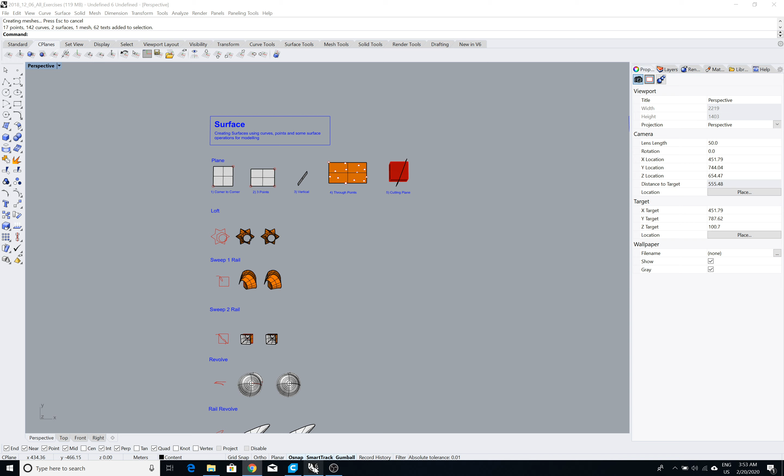Today is the second session for Rhino, and we will be starting our day with surfaces as a topic, and eventually I will also go through some transform commands while using the software.

Last week we did more or less all the commands in curves, and we tried to explore different ways of creating a curve and different ways of changing the curve, such as extending, filleting, chamfering, connecting, blending. I also showed you some of the examples that we could create from curves from two views.

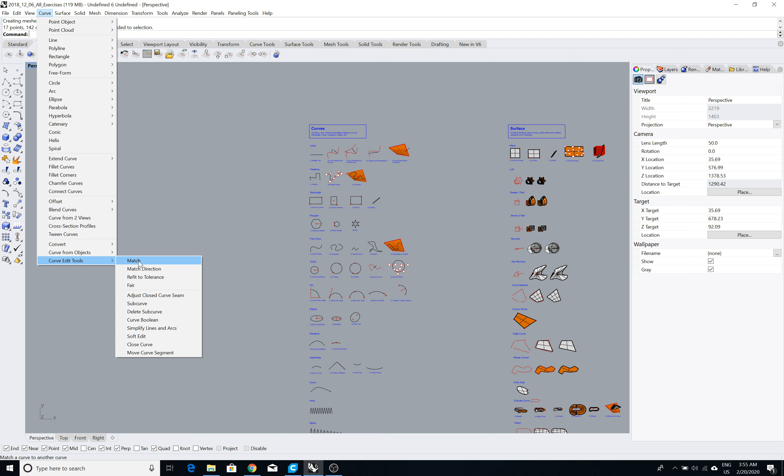I have purposely not gone through some of the other utility commands that you see in the curve tab, such as project, pullback, intersection, contour. I'll go through some of these commands later during our sessions. We would in fact start to create some geometries today, as we would have a good understanding of surfaces by the end of our lessons.

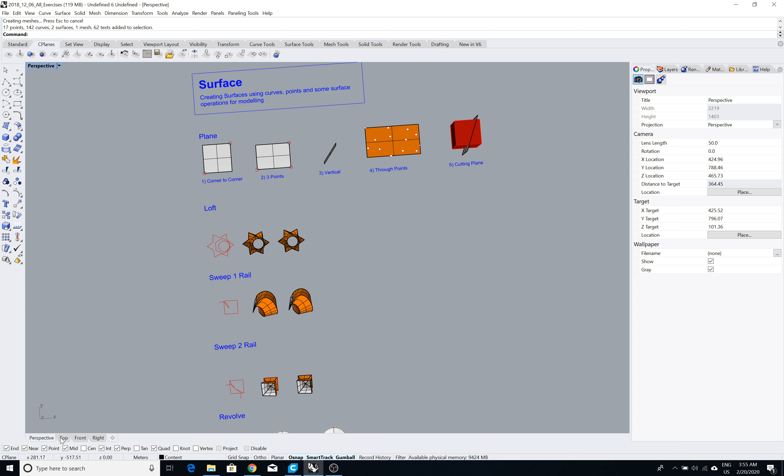So talking about NURBS surfaces in general, they are completely different from the surfaces we might be seeing in different modeling softwares. A property of a NURBS surface is that you can consider it as a plane with direction. You can name both directions as u and v, and the real definition of any point on this surface would be defined by its value between 0 to 1 and the degree of the points.

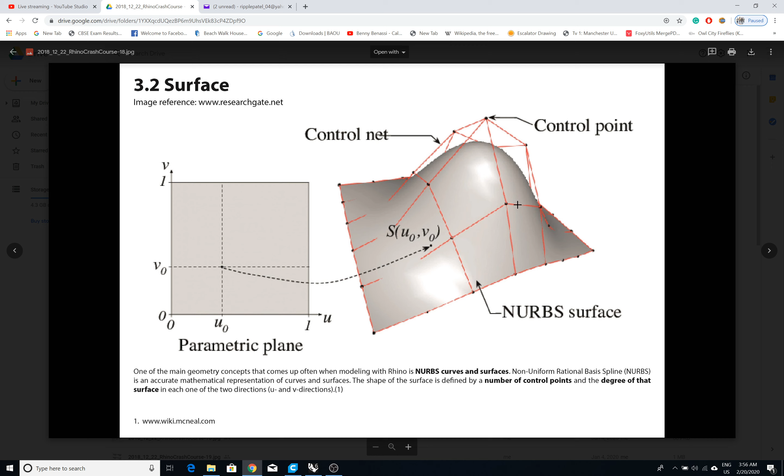So as you see in this image, each point has its own index, such as in this case u0, v0, and it has its own degree. That defines the curvature of this surface, and that you could say is a NURBS surface.

So there are some pros and cons of why we should be using NURBS surfaces and why we should sometimes be using mesh surfaces, but the most efficient way that I found would be to use a NURBS surface rather than a mesh surface, particularly in this software. There are other softwares which do this job quite well, but I think Rhino is more efficient and faster than most of the mesh modeling softwares.

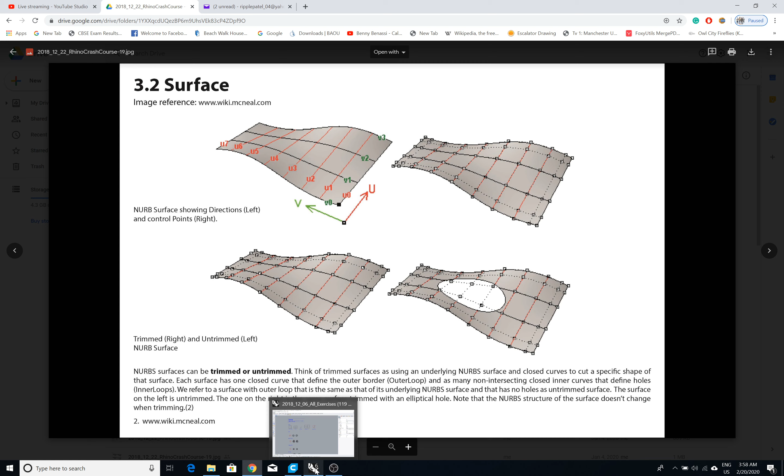But that being said, you could understand this better once we start modeling some things with surfaces, and once you start to understand some of the commands for creating a surface and some of the commands which act as utilities to these surfaces.

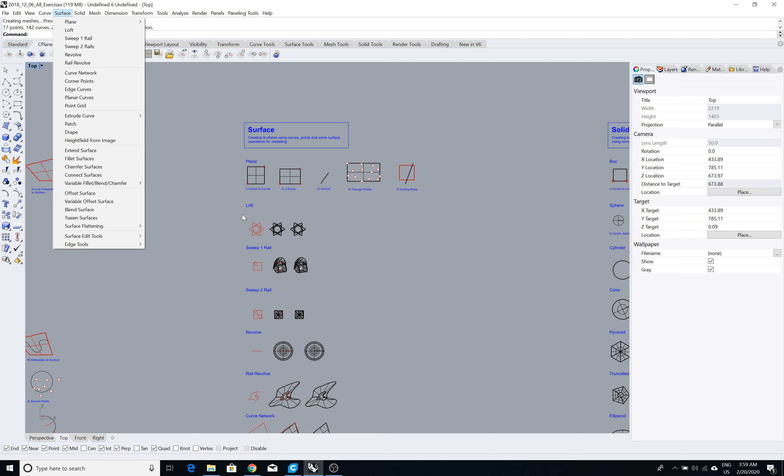As we discussed in our previous session, the first half of these tabs would be filled with commands which help in creating the surface in the design space, while the rest of them are utilities such as extending, filleting, chamfering, as we learned in our curves command tab.

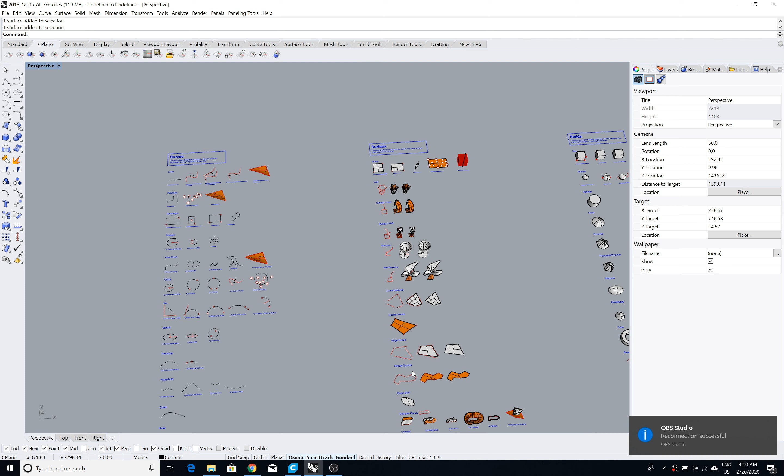So to start with, the very basic surface would be a plane. You could use either a planar surface command or this planar curve command.

So in this case, say if you have created a rectangle, and I would like to create a surface of this rectangle, I could just select the curve, go to surface and say planar curve. I will get something like this.

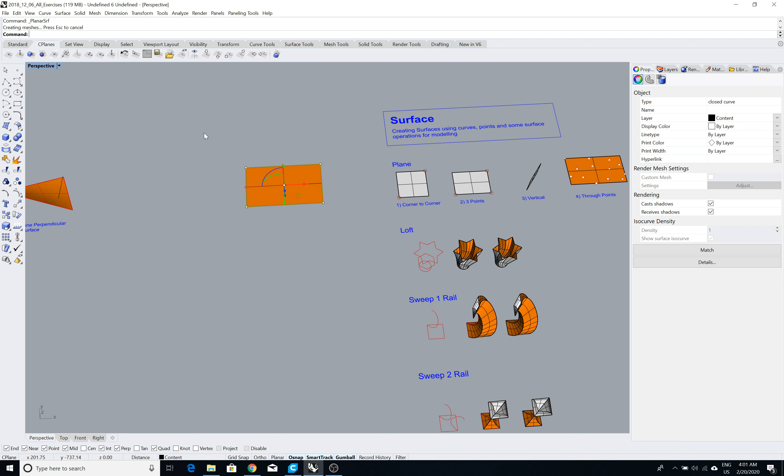While we are creating a surface, there are positive and negative sides of the surface. What I mean by positive and negative side, or a better way to say this, is the front and the back side of a surface.

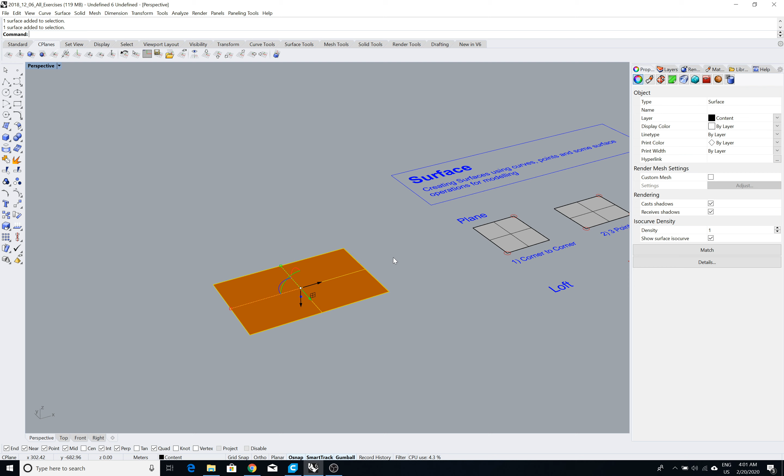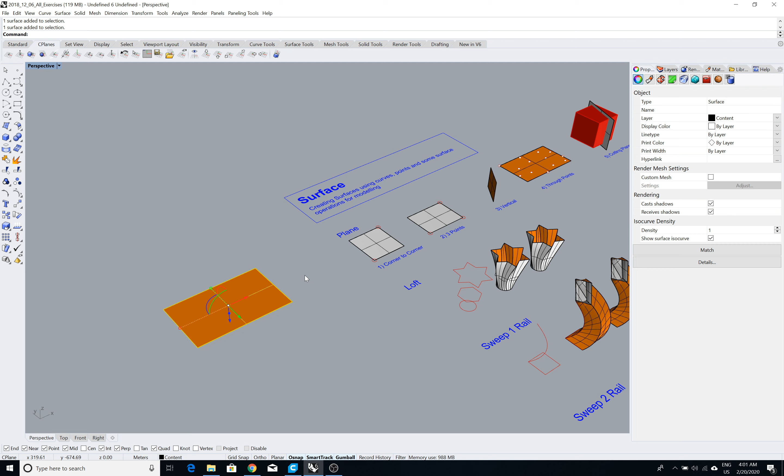So in this case, I have set in my preference the negative or the back side. As you could see, some of the surfaces have a grayish or whitish shade, while some of the surfaces show a more orangish look. So you can see this particular geometry very clearly, and you could easily depict that the outer surface has a gray shade and the inner surface has an orange shade.

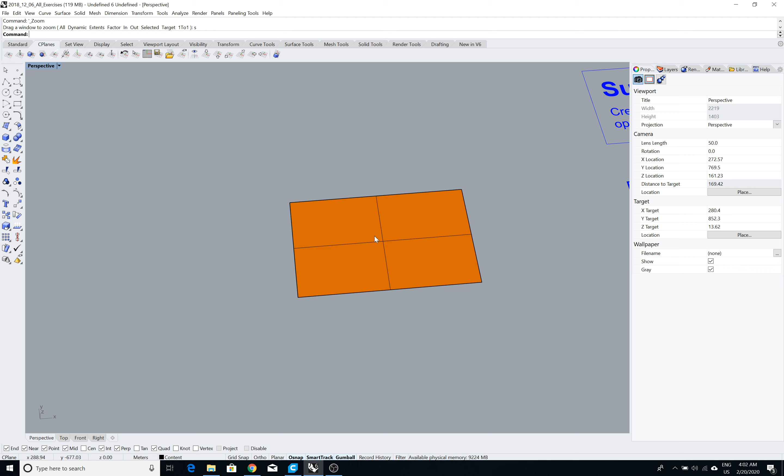Sometimes it's quite necessary to have the faces, the interiors or the exteriors, the same as the other ones while we are using these surfaces. If you are just independently creating some things, it's okay to have a negative surface, but I'd recommend you to model with more positive surfaces.

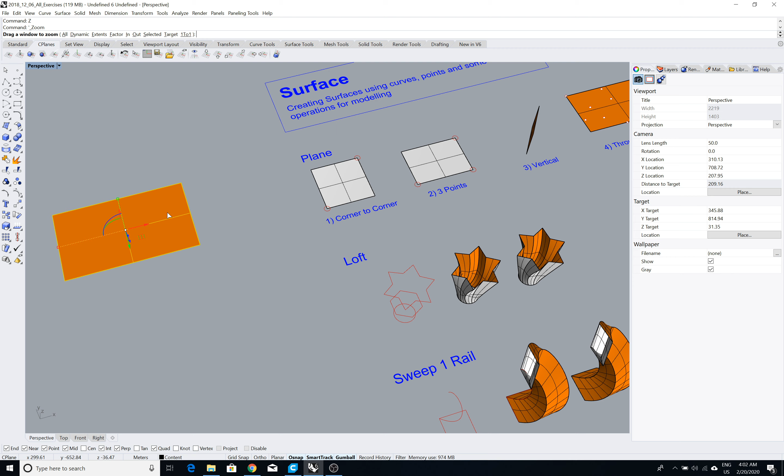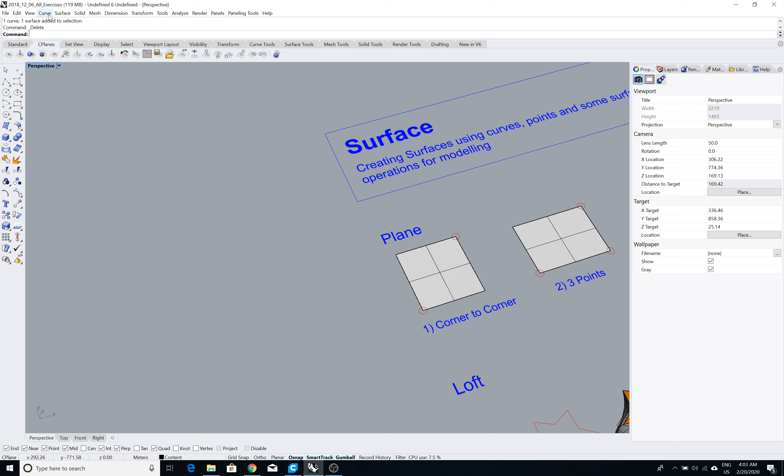If you would like to flip this, you can just type in the command box flip, and you should be able to find a surface which is positive. But before that, let's start by making a plane, or making a planar surface. So it's quite easy. As I said, it's similar to creating a rectangle, and there are other ways you could do it.

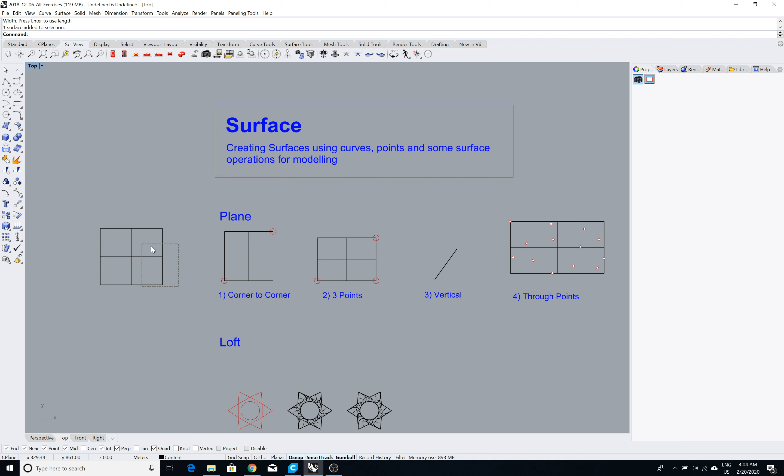I'll just very quickly go through some of these commands. I'm sure you have this file and you will be referring to this file while you are creating your own personal library or catalogs of this practice material, and I think it's a better way to practice, where you could just use this file as a reference and create your own version of this file to remember it yourself.

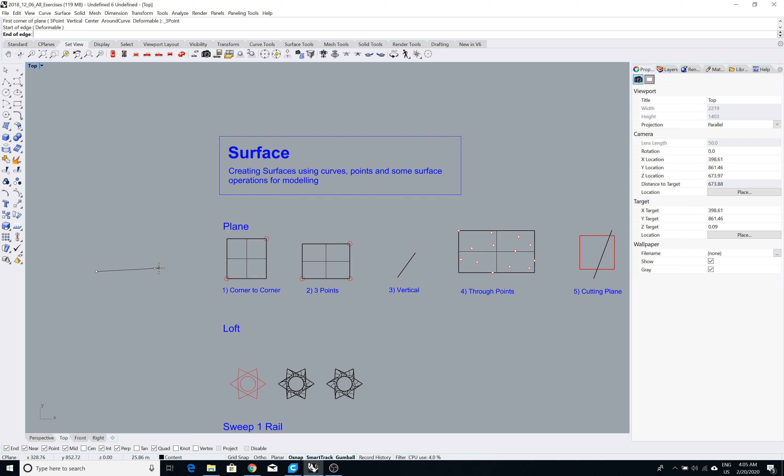So I just created a surface with 3 points. It asks for a start of the edge, so I specify my start point. I say that I need 10 units, so I can see that it limits the length to just 10 units, and I can choose a direction in which I would like to have my length oriented, and then I could just type in another unit, like 20, and you can see that it also asks for the direction in which you could orient your plane, and that's how I make my plane with 3 points.

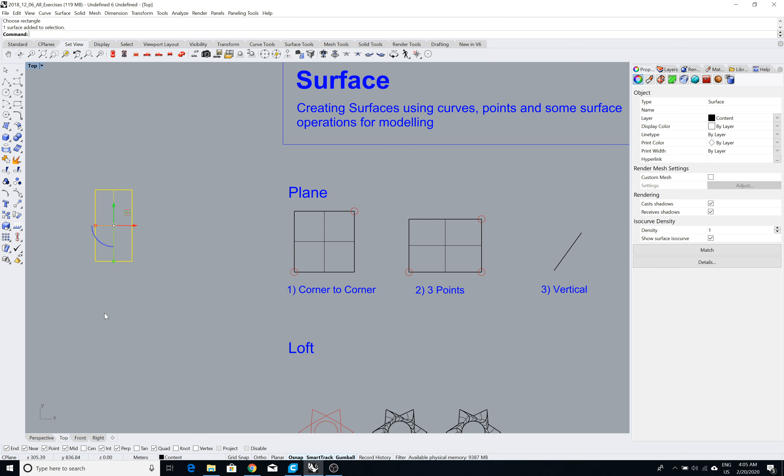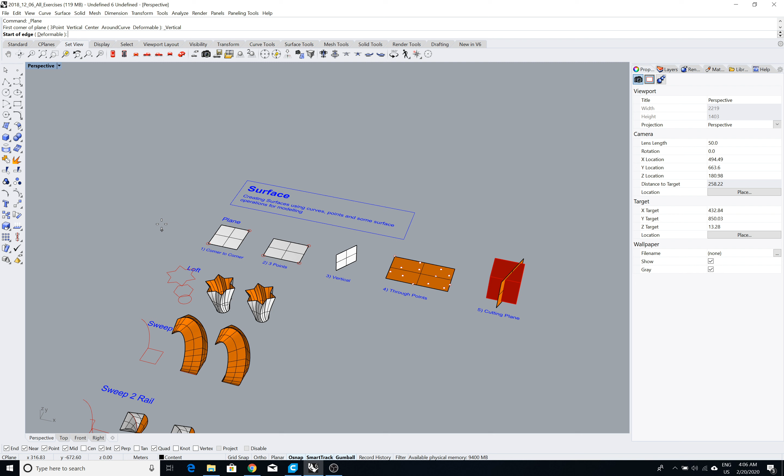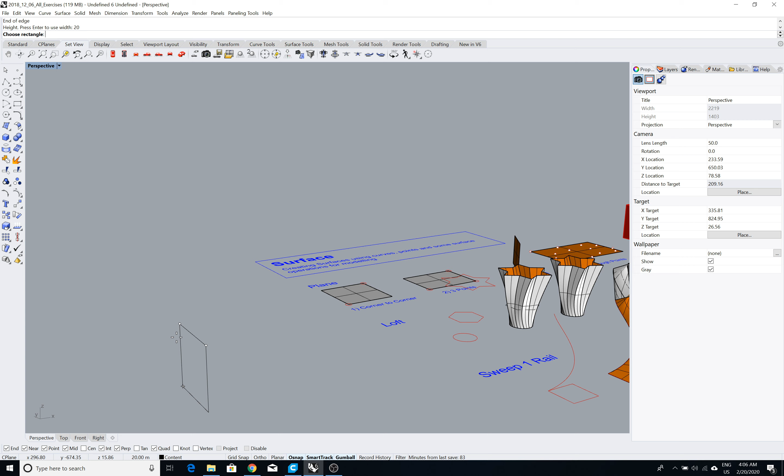Another good example would be creating a plane which is vertical. So let's say you have this surface and you would like to create a vertical plane. So I select the length, let's say 20, and it's gonna ask me for a direction in Z. So let's say again 20. It asks me for a positive Z or a negative Z. So this is one way you could create a vertical plane.

You could also create a plane through points. So if you have this bunch of points, you could just select these points and say surface plane through points, and it would create something like this, as you can see.

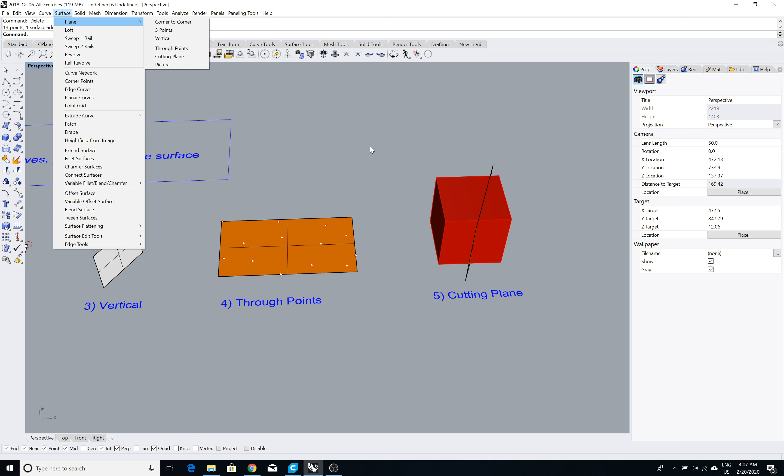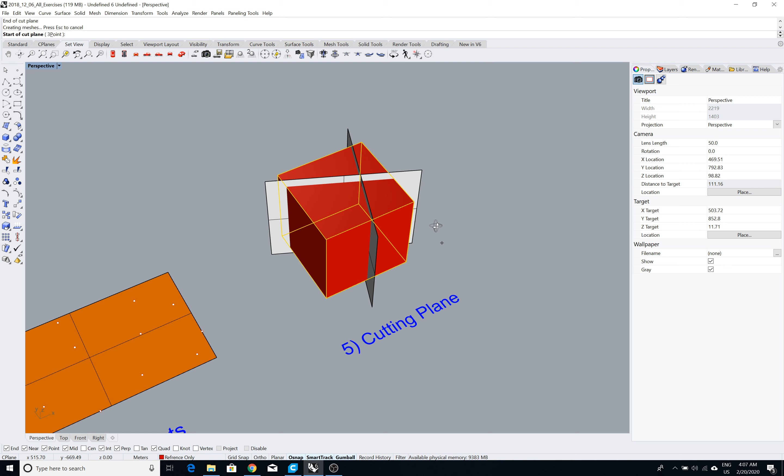Another cool command that I would like to show you would be a cutting plane. So if you have already existing geometry and you would like to just cut a plane through that geometry, then you could use a cutting plane. It asks to select objects for cut, press enter, start of the plane. Let's say I want to start my plane here and end my plane here. So it would more or less create something with some tolerance. So you can see this is the tolerance.

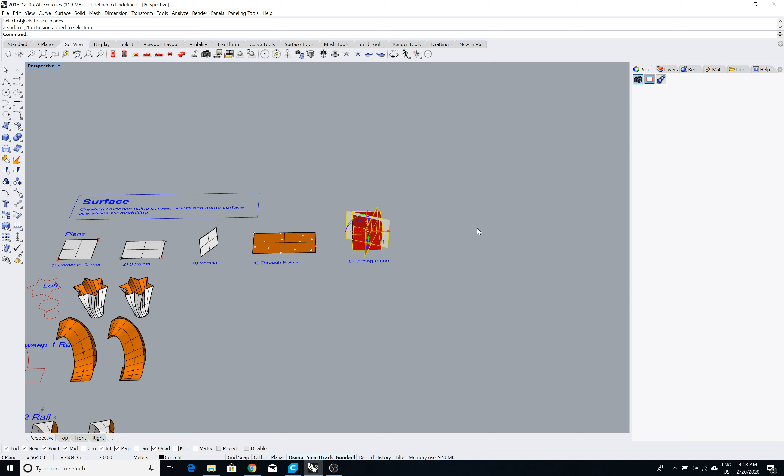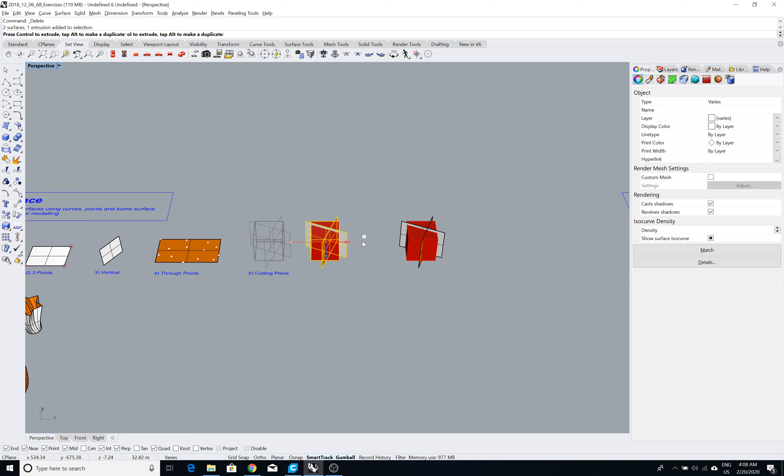So what are some advantages you could have from here if you would like to have multiple planes? Let's take this geometry somewhere and create something from here. To copy or duplicate anything in Rhino, you could just select the object, press Alt and drag your geometry in whatever direction you would like. So again, select the geometry that you want to copy or duplicate, press Alt and just drag your gumball. That's a shortcut to create a copy and duplicate.

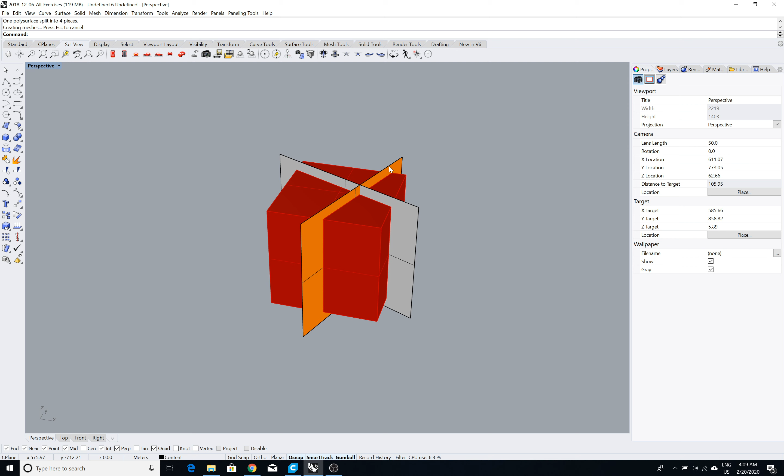What you could do is you could just use these planes to split the object at multiple locations. So let's use this command called split, and you can select the object and you can select the plane through which you would like to split. I'm just gonna hide it. Control H is the short form of hide.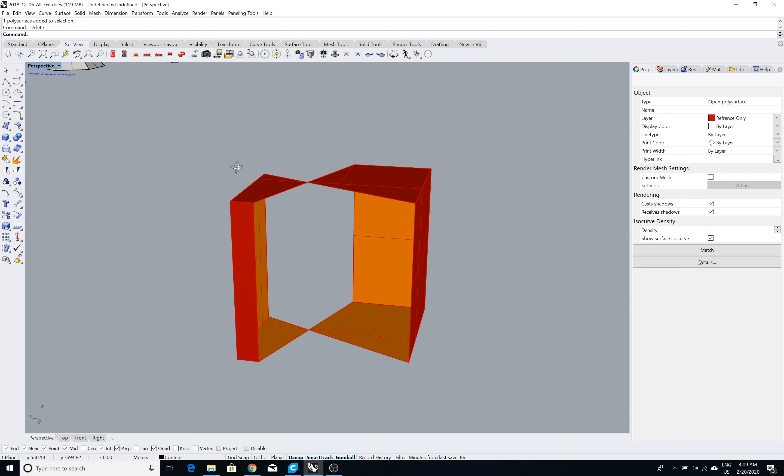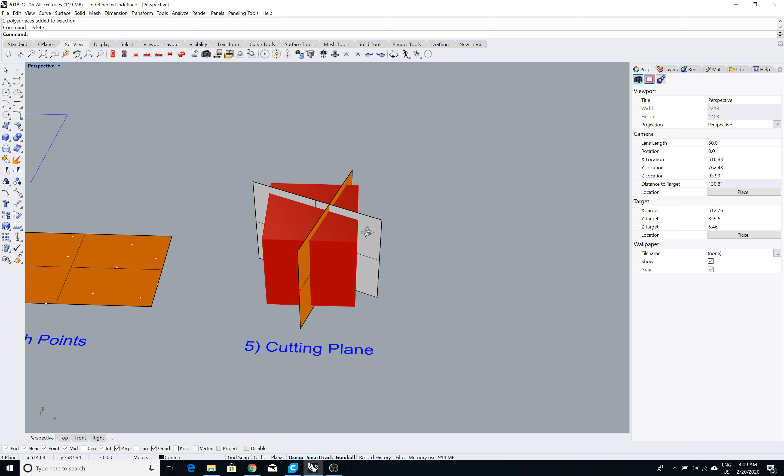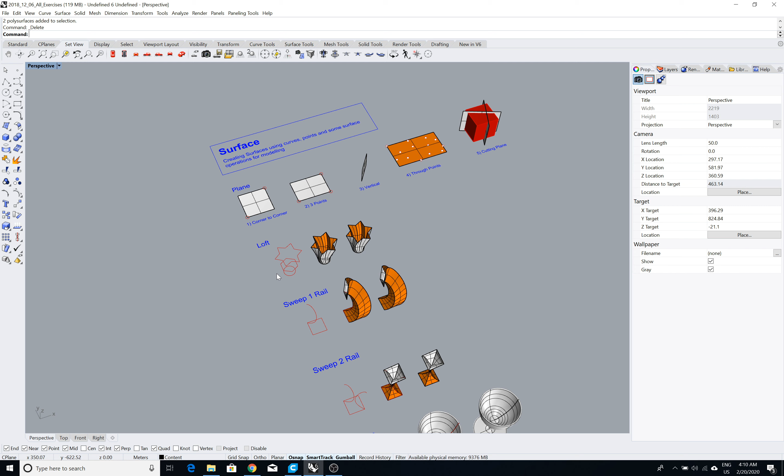You can try to create some geometry as you might desire with this particular cutting plane technique. I would like to see how effectively you could use these tools. So we will go through creating some geometries like this using such techniques later while exploring other geometries, or while we start formally with creating each of the geometry that I have created on this particular screen. So I would formally introduce you to some of the very cool and easy techniques for creating geometries.

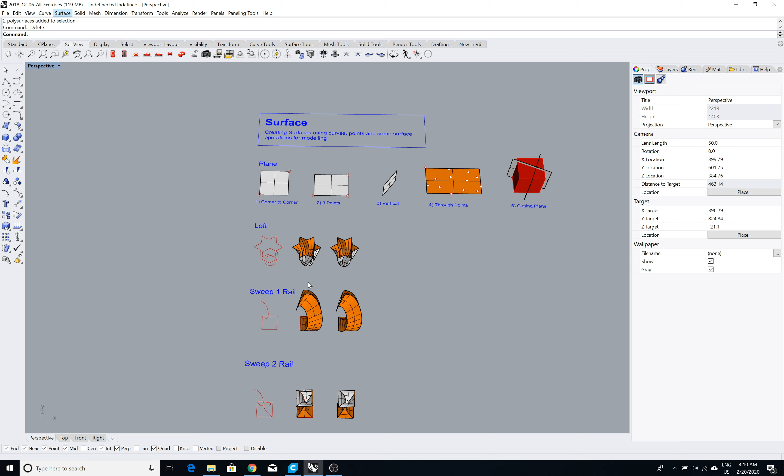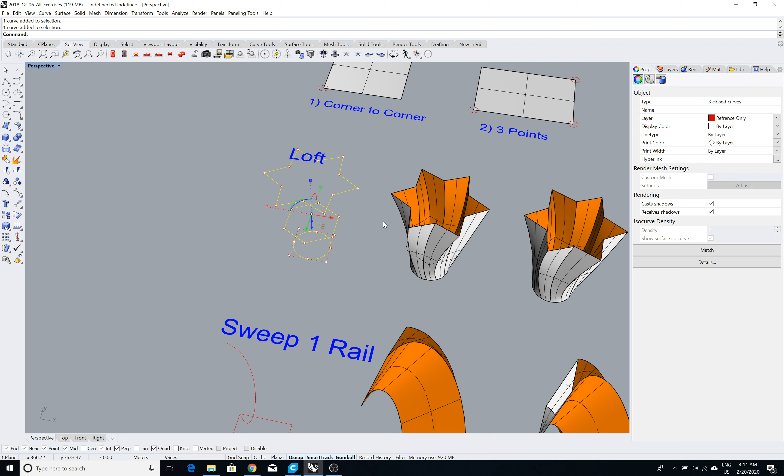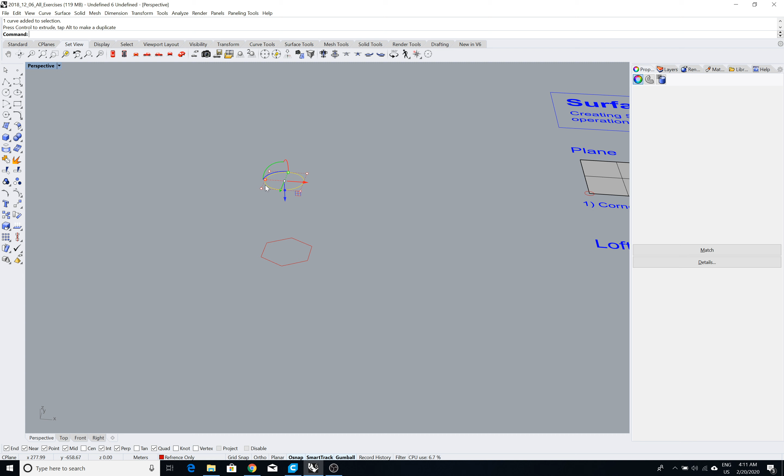Going to the next command we would be looking into is loft. So what a loft means is if you have a set of curves, it basically creates a surface taking or considering these curves as your cross-section geometries. So let's take these curves. I'm just dragging in these curves, and I could just grab this again, and I'm just gonna scale this. So I'm pressing shift to scale it evenly.

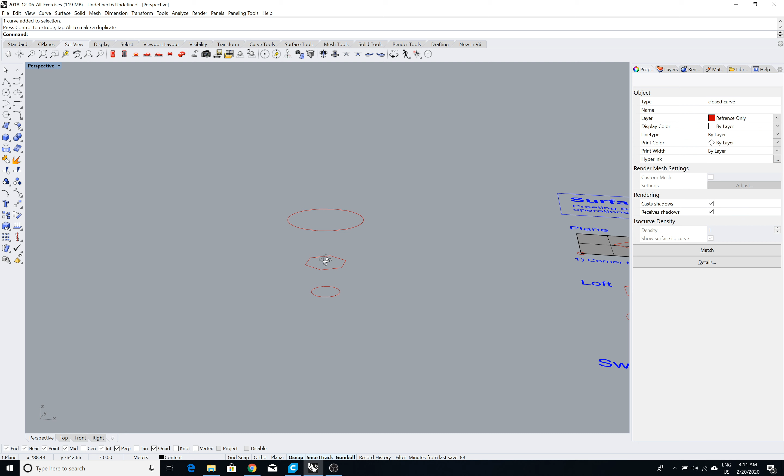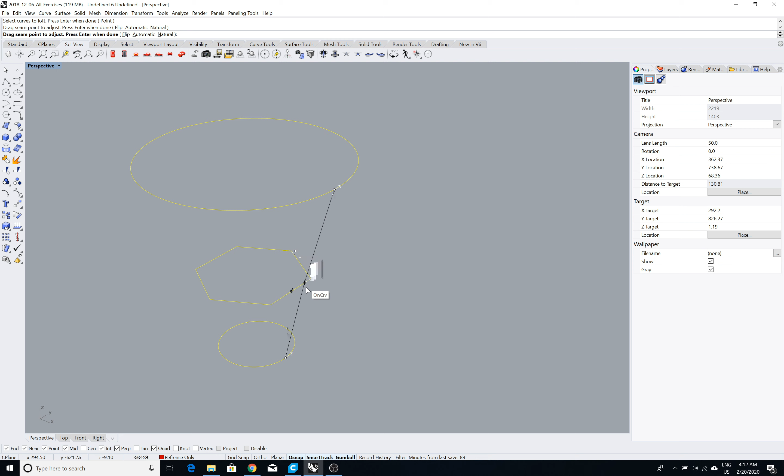Okay, so I have these three geometries, and I would like to create a surface between these three curves. So how could I do that? So I go to surface, I do loft, and it asks for select curves to loft. So you can select all these curves and you can just press enter. It's gonna ask for the starting of the curve, so you can start from wherever you would like. Let's say I start from here, and I press enter.

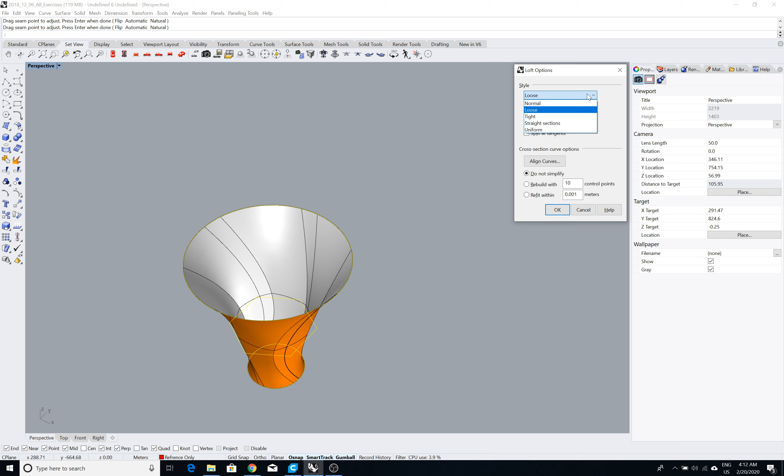So you could see that it creates a surface from the starting point where I have mentioned the seam lines, and eventually it forms a surface between these three profile curves. I would have a loft option box where I could select different settings. Let's say if I want to have a straight loft, I could see something like this. If I want to have something which is loose, you can see my model, and whatever you're comfortable with, you can have a closed loft as well. So if you would like to have something closed, it could turn something like this.

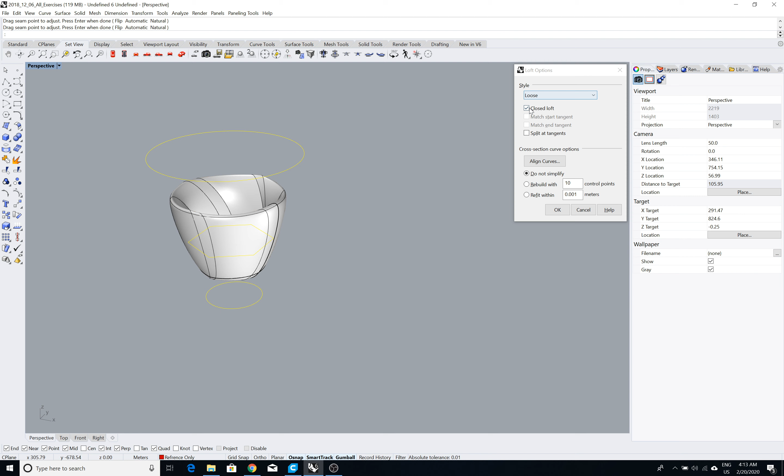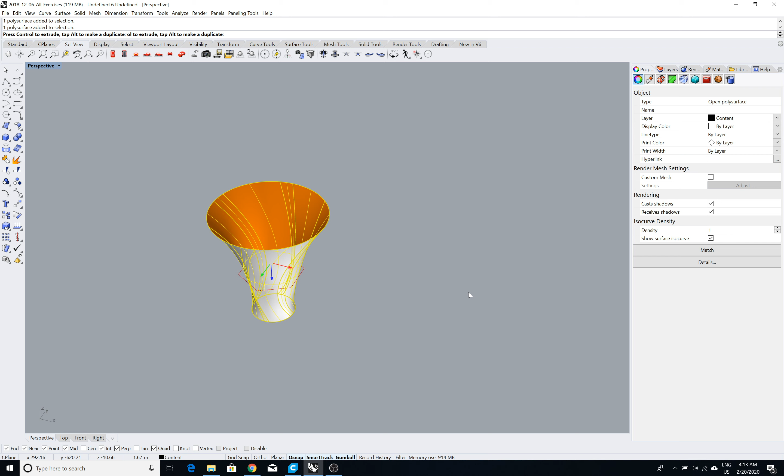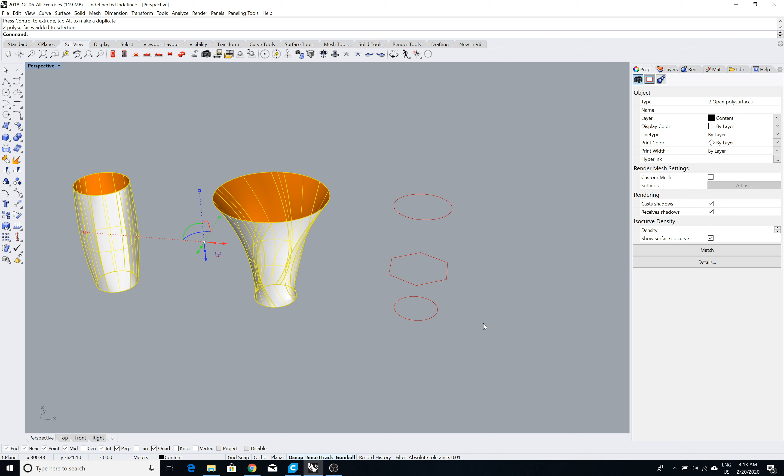I would prefer that you start with an open loft, and eventually you could create a solid object of this single geometry later. So I would just select here, and this could be a very good way of creating some geometries from curves. So again loft, and you can see that I have already created, like it gets so easy once you get your hands on this particular command. You could create as many options as you like.

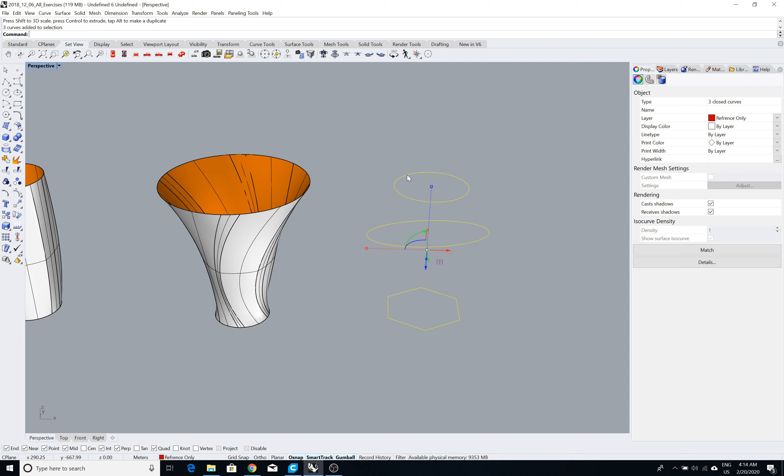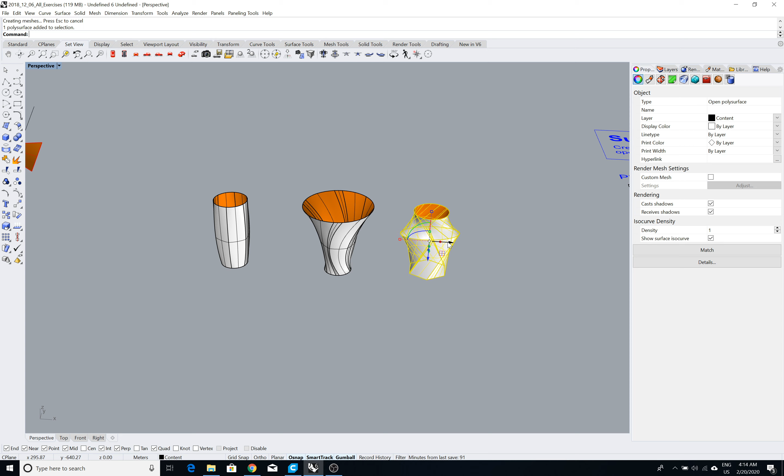Maybe you can just start to play with these curves, and so I'm just randomly creating some geometries, so you can see all these different options that I could create. You could later give it a bit of thickness and then 3D print these geometries at different scales.

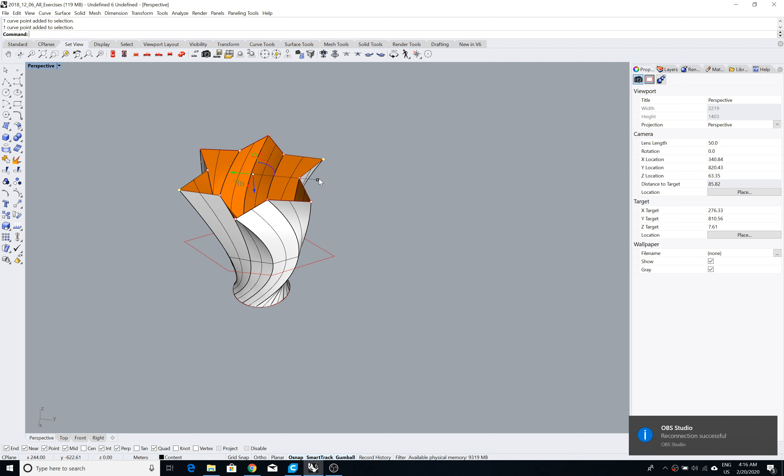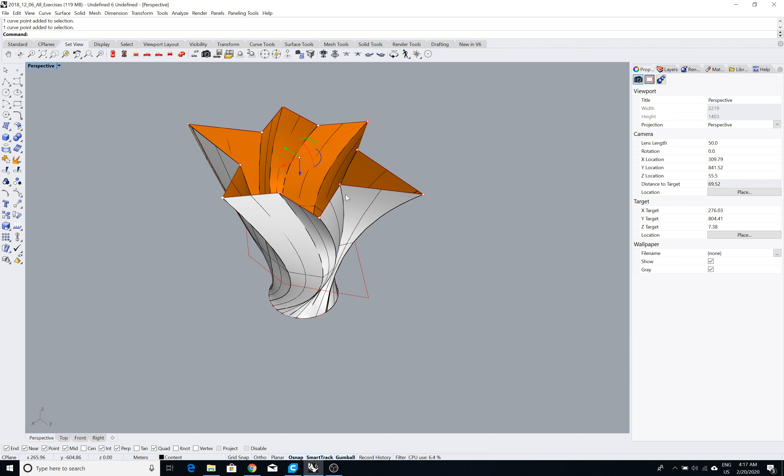So that's a loft option, but I would like to also focus on this. So to do that, you can just keep your data or the task that you have previous to this, and eventually it tries to perform that again as you update the model. So I have asked my software to just record this part where I am creating these curves and I'm lofting these curves, and eventually just perform it as I do my next move. So that's how you could see.

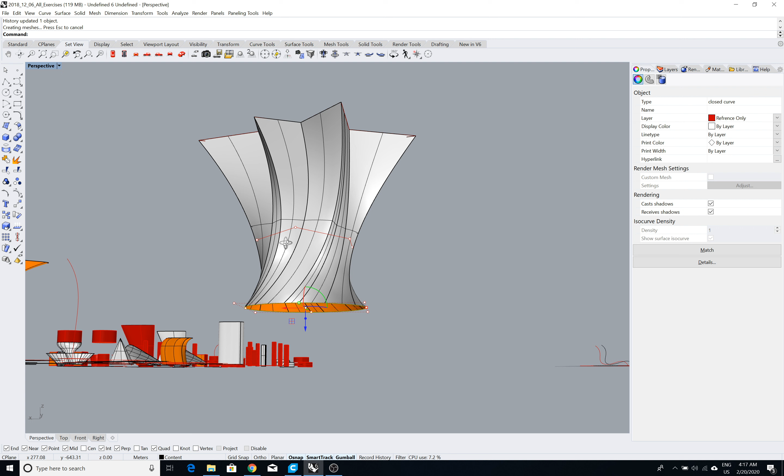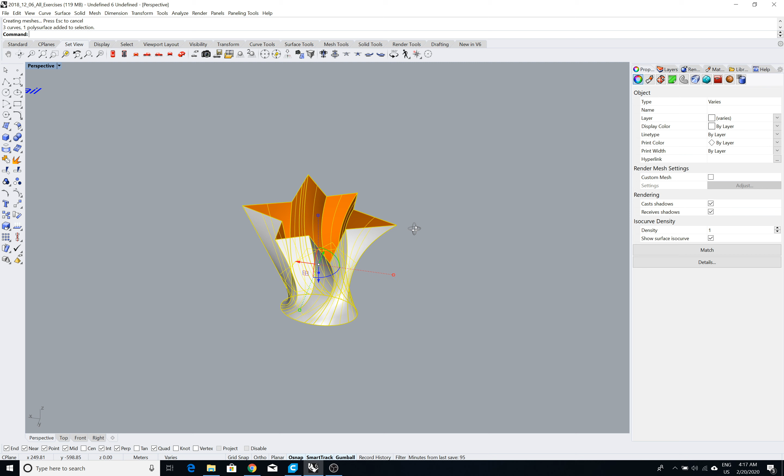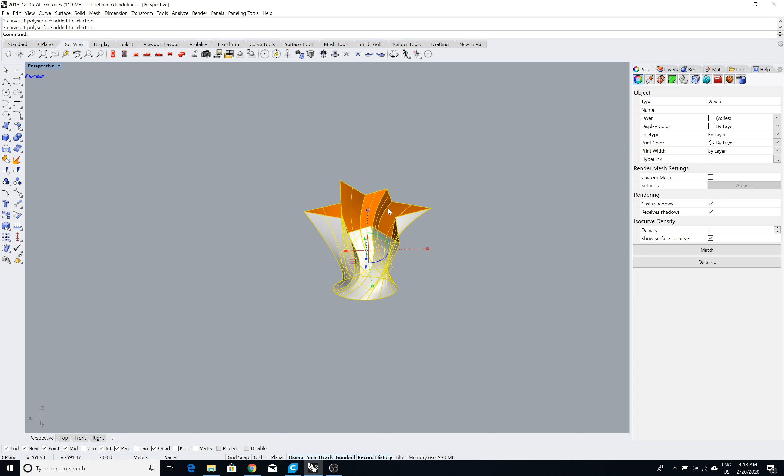So you could see that I'm changing my curves, and eventually my geometry is changing as well. So this is a good way to update your model very quickly if you are not sure of your geometries and if you are still in that trying and testing mode. You can use this with mostly every command that you have. You just need to keep your record history on, and you need to perform that command after that. Eventually, if you update your geometry, it's gonna be updated with the same command that you have performed previously. So I'll show you another good example for record history, as well as with some of the other commands we would be using for creating the surface.

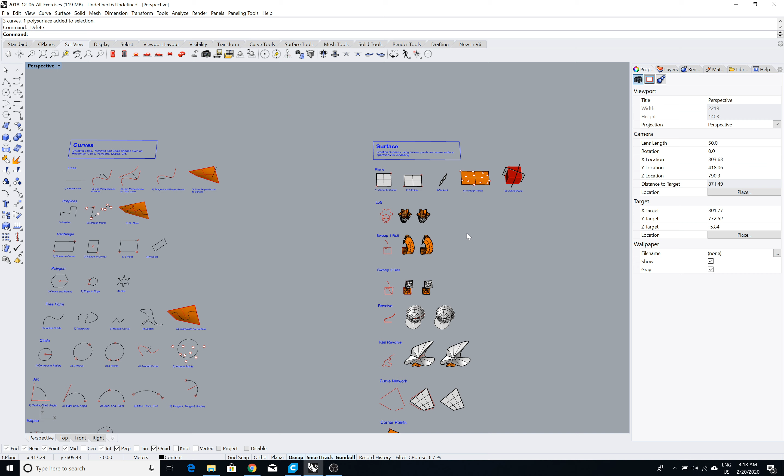Next one is surface using sweep one rail. So what does sweep one rail mean? It's more or less a follow-me kind of command.

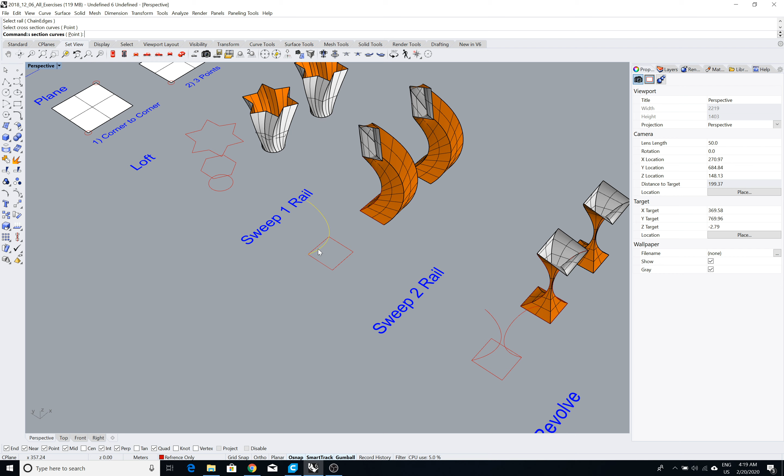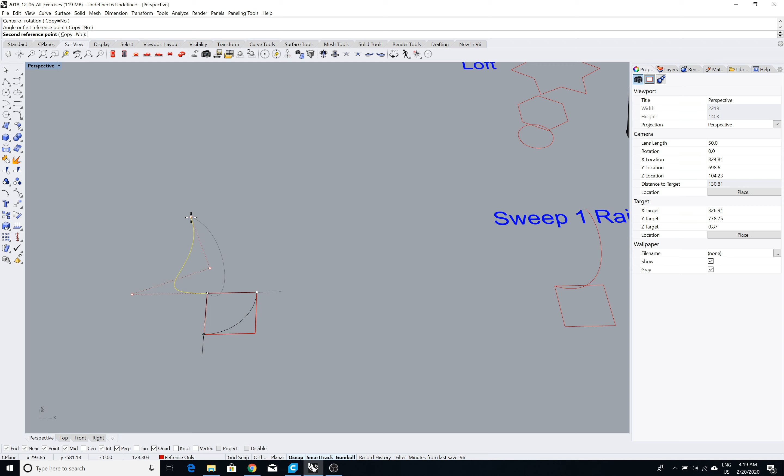So you give a curve and it eventually follows the path that you have provided. So let's say I have these two curves, and what I would like to do is create some geometry by using these two curves. So I would go to my surface.

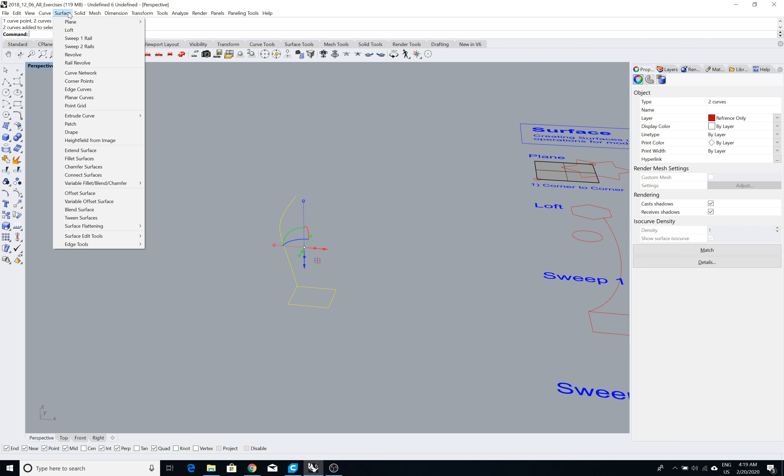I would say sweep one rail, and I would select the rail first. Rail is the curve on which the other curve would travel, and it would ask to select a cross section. So I would also select the cross section, and when I'm done I just press enter.

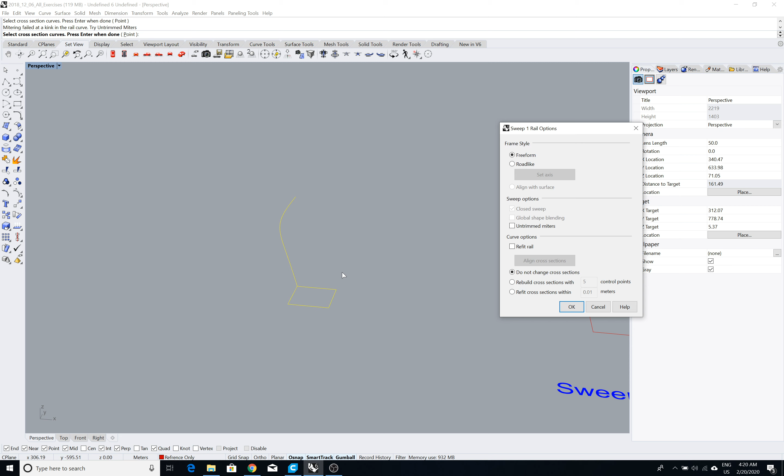So there would be this option box that opens up. You could have a freeform, or you could have a road-like roam. So I could just say, let's say, do a freeform.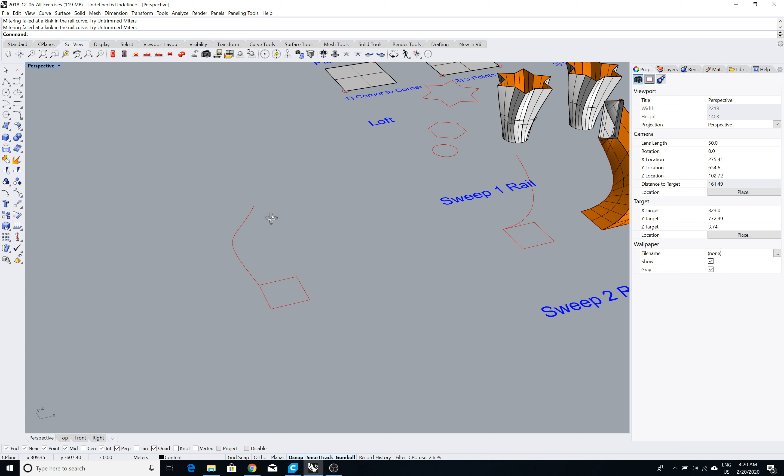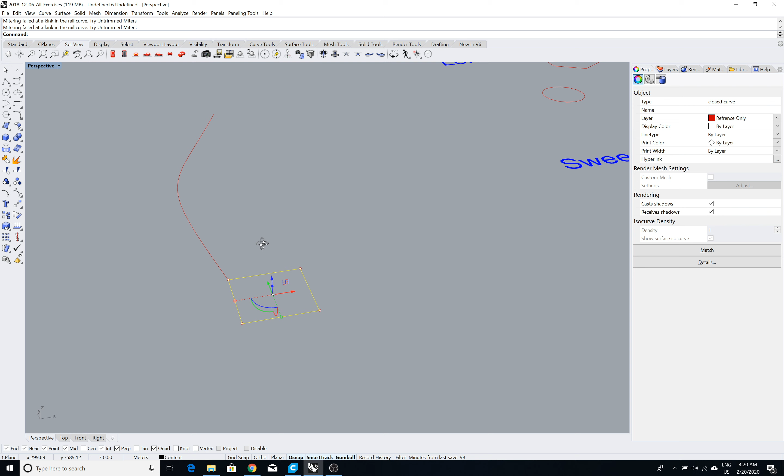Let me try again. So select the curve, cross section. I think there might be some problem with my curve, so let's try it with a different curve.

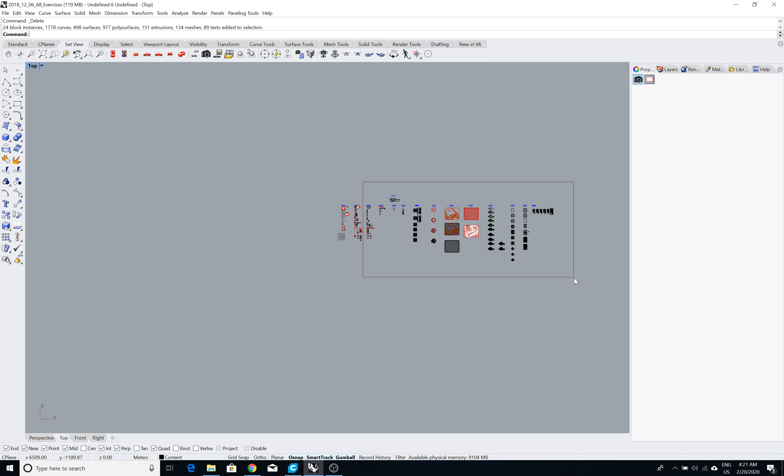Let me just first hide all these unwanted elements. I'm just going to hide it by saying Control H. Okay, now it looks a bit more clear.

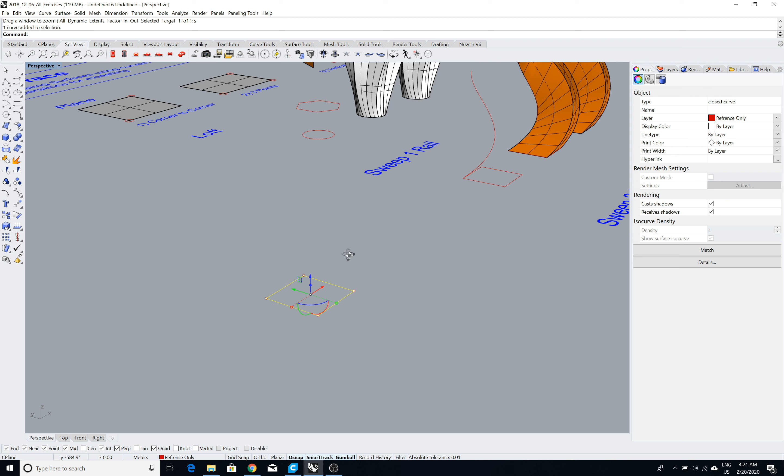So this is my first curve, or the rail that I will be using, and then the next curve is my cross-section curve. So let's take a cross-section curve in a plane to just start simply. I'm just going to make a curve with my project on.

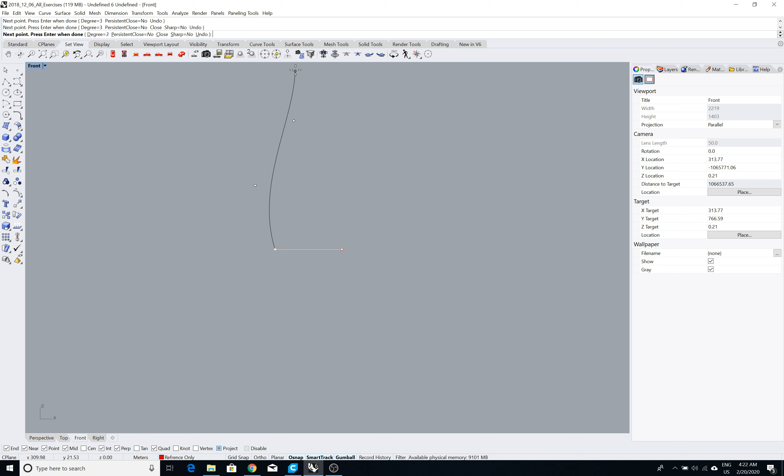Let's just take this curve for simplicity. So because I have kept my project on, my curve should form somewhere here. Okay, that's my curve.

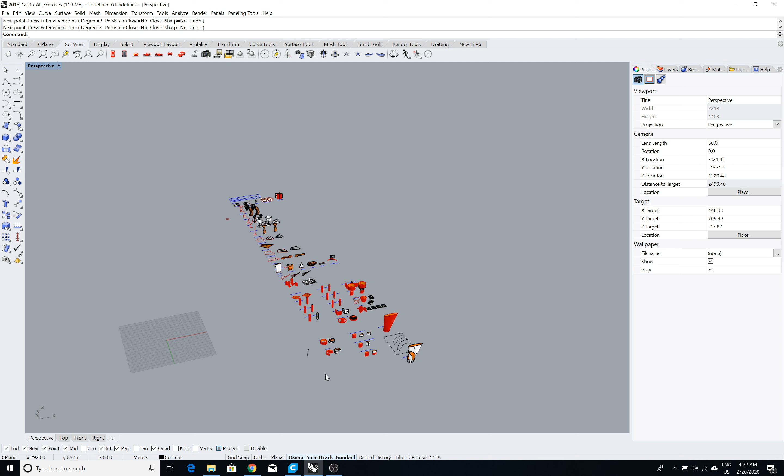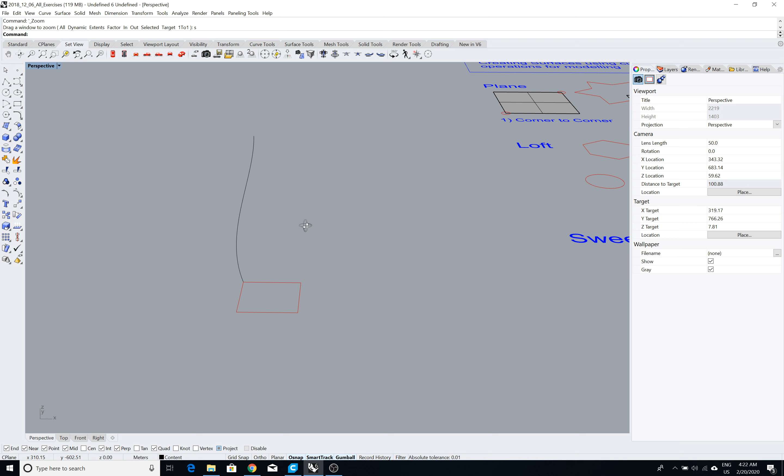So I am using the move command, which is a transformation - that's a transform command we are using here. So that's transform move, and the shortcut for this command is MOVE. You can just type in move, select the object, take the point, and move it to whatever location you would like to have.

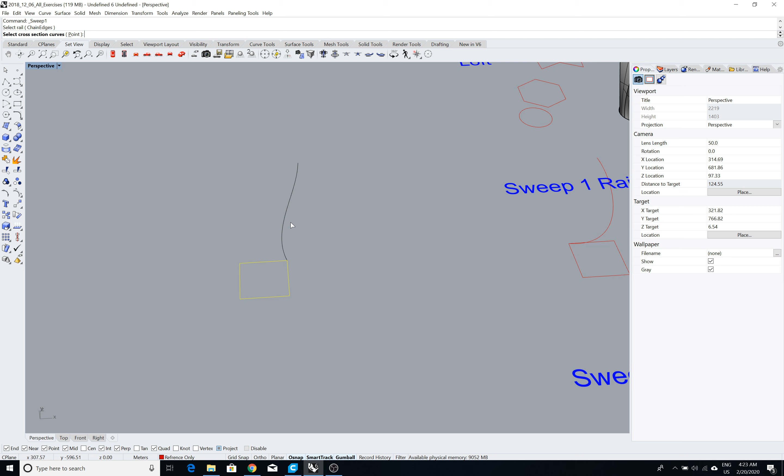So now we should be getting some result with sweep one rail. So I select, and I select the cross section, and as I do that, I see something happening here - eventually it's kind of creating a box-like thing, but okay, let's see if I have an update.

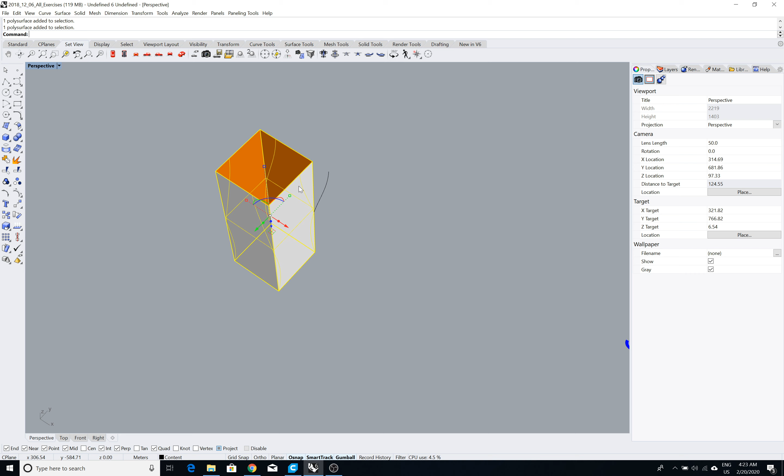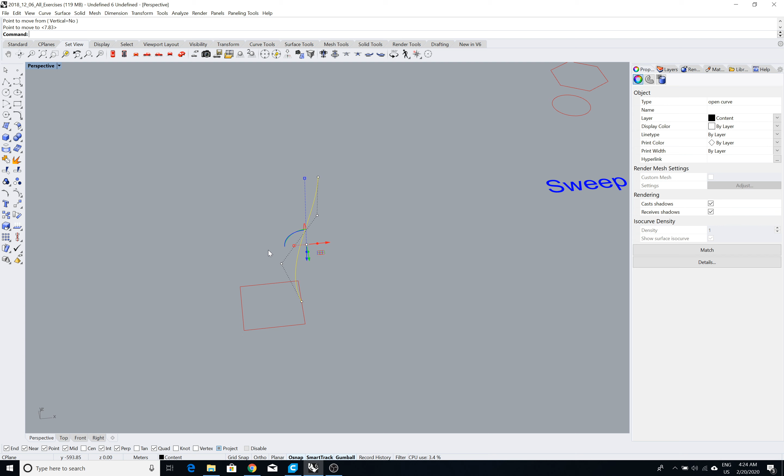I think I just need to change my curve. This curve seems to be a bit boring for me. So let's try - or in fact, let's just try to shift this to the center. If you would have kept your mid object snap on, you would be able to find the mid of this particular curve. So I'm just going to change some bits of my curve.

If you have Rhino 5, you might not get the control points at the first instant. In Rhino 6, if you select any curve, you would get these control points at the first instance, which is an easy way to control these curves. But if you're just trying to, if you would like to change your curve with your control points, you can just go to your toolbar.

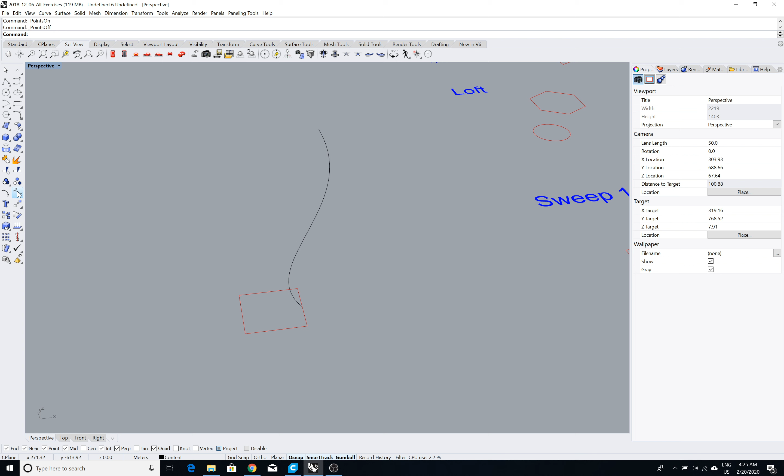You can just select this particular tool - select the curve that you would like to have, select the curve which you would like to change, and select this command. If you press on the left, it says show control points, and if you press on the right, it says point off. So if you say points on, select this, select object and press enter, you should be able to get the control points.

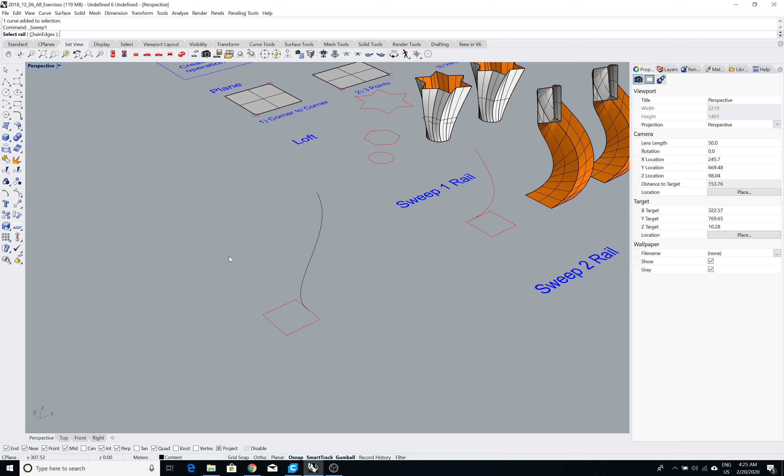So to develop a surface from sweep one rail, you just select the surface, sweep one rail, select the rail, and select the cross section. So there it is - you have your curve here. So that's your sweep one rail.